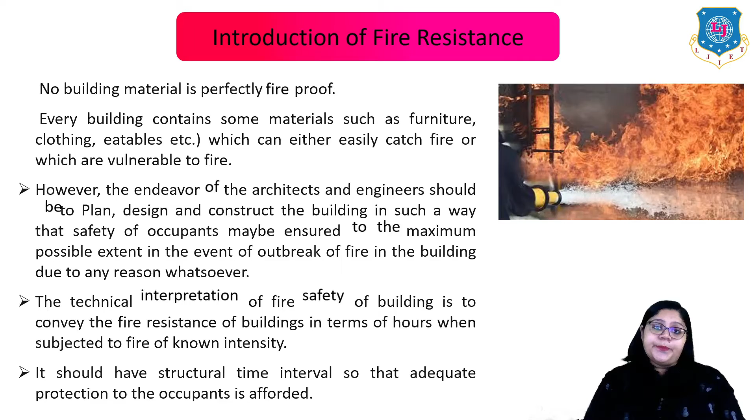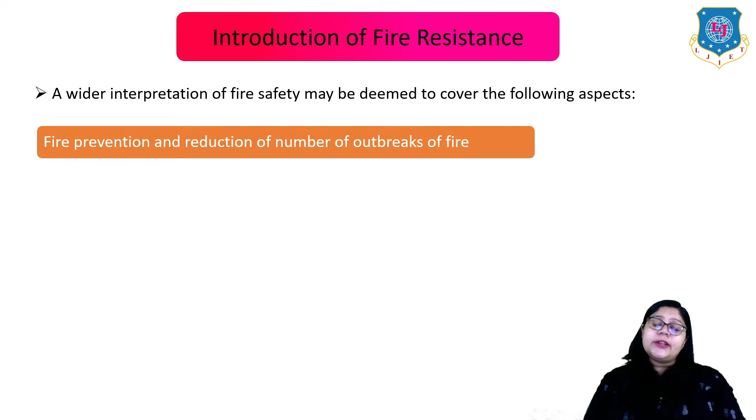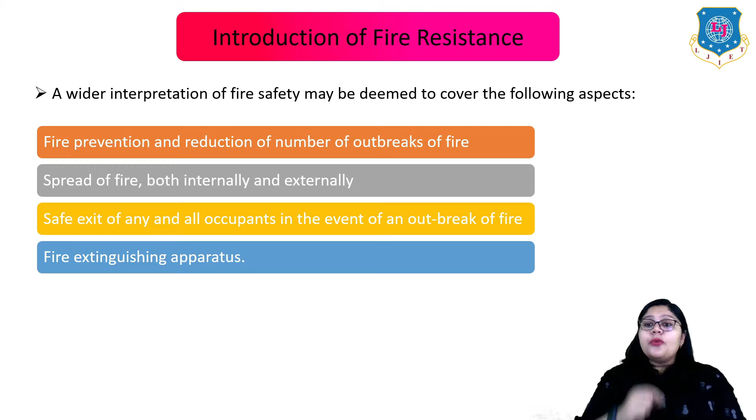A wider interpretation of fire safety may be deemed to cover the following aspects: fire prevention and reduction of number of outbreaks of fire, spread of fire both internally and externally, safe exit of all occupants in the event of an outbreak of fire, and fire extinguishing apparatus. Let me show you some causes of fire.

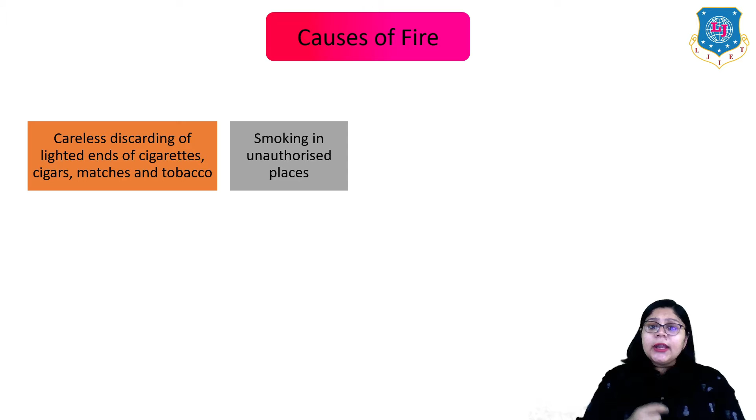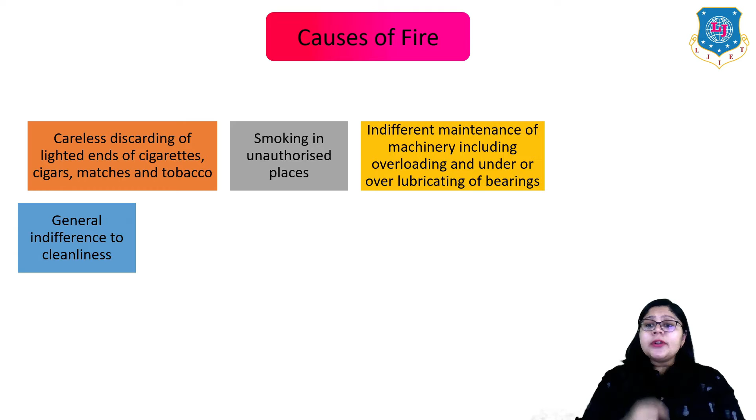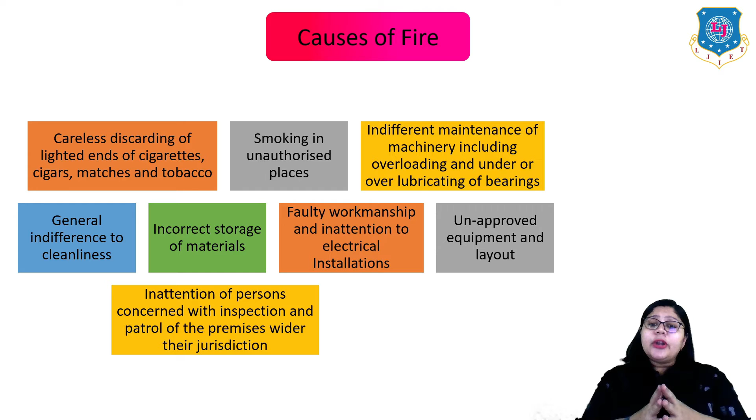The first cause is the careless discarding of the lighted ends of cigarettes, cigars, matches and tobacco, or smoking in unauthorized places. Other causes include indifferent maintenance of machinery including overloading and under or over lubricating of the bearings, general indifference to cleanliness, incorrect storage of materials, faulty workmanship and inattention to electrical installations, unapproved equipment and layouts, inattention of persons concerned with inspection and patrol of premises under their jurisdiction, and even unattention of fire safety regulations. So these are the different causes of fire.

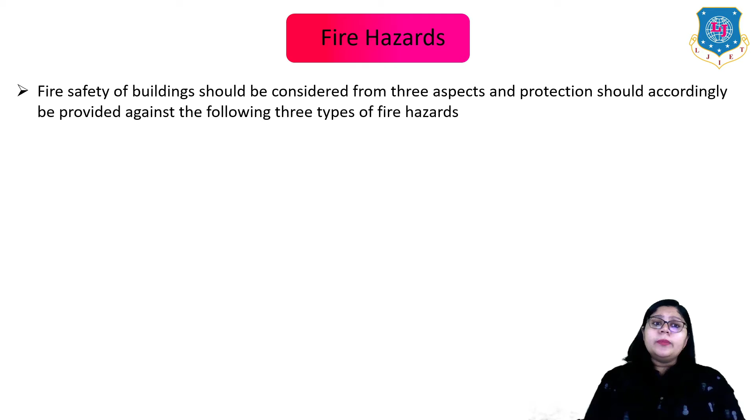Now let us see some fire hazards. Fire safety of building should be considered from three aspects and protection should accordingly be provided against these three aspects of fire hazard.

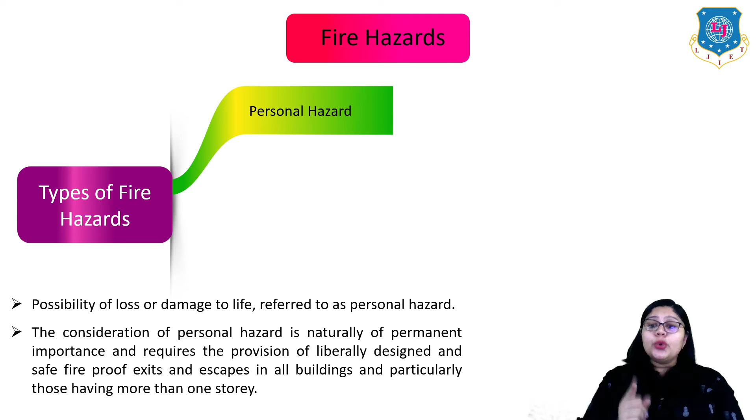The first type of fire hazard is personal hazard - the possibility of loss or damage of life. The consideration of personal hazard is naturally of permanent importance and requires the provision of liberally designed and safe fireproof exits and escapes in all buildings, particularly those having more than one story.

Second is the internal hazard - the possibility of fire occurring and spreading inside the building itself. Internal hazard concerns damage or destruction of the building and directly influences personal hazard. The internal hazard is directly related to the fire load, which in turn enables the building to be graded when considered along with the duration of fire.

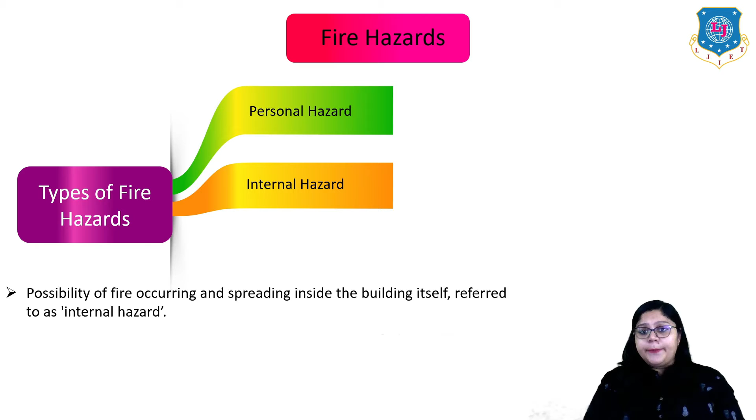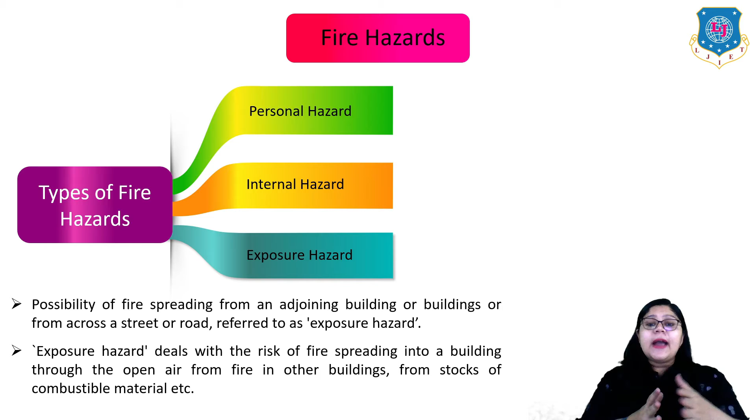The last one is exposure hazard - the possibility of fire spreading from an adjoining building or buildings, or from across a street or road. Exposure hazard deals with the risk of fire spreading into a building through the open air from fire in other buildings or from stocks of combustible material. So these are the three different types of fire hazards.

Now let us understand the most important term, which is fire load. Fire load is the amount of heat in kilocalories which is liberated per square meter of floor area of any compartment by the combustion of the contents of the building and any combustible part of the building itself. This amount of heat is used as the basis of grading of occupancies. The fire load is determined by multiplying the weight of all combustible material by their calorific value and dividing by the floor area under consideration.

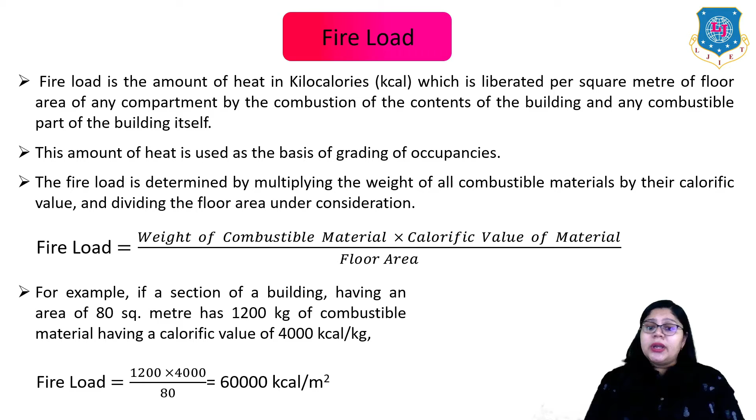So fire load is equal to the weight of combustible material multiplied by the calorific value of material, divided by the floor area. For example, if a section of a building having an area of 80 square meters has 1200 kg of combustible material having a calorific value of 4000 kilocalorie per kg, what will be the fire load? Simply put all the values in the equation and you will get the fire load. So that is how we can calculate fire load.

Different materials having the same weight and the same calorific value may present different hazards on account of other properties, such as rate of ignition, speed of burning, and liberation of dangerous fumes. So materials are classified for the purpose of assessing fire grading under the heading non-hazardous, hazardous, or extra hazardous based on the following characteristics.

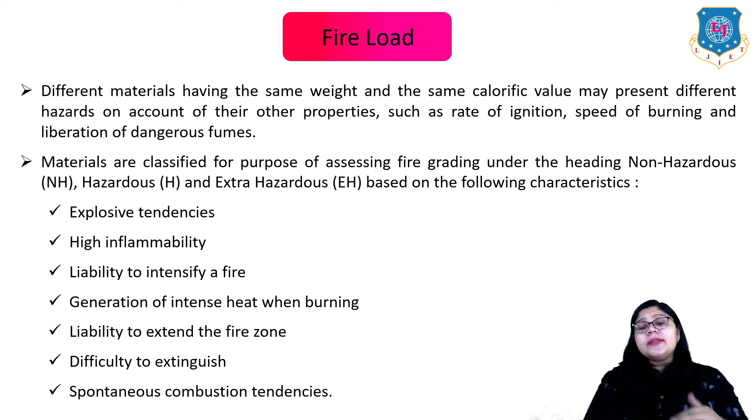The first characteristic is explosive tendencies, then high inflammability, then liability to intensify a fire, then generation of intense heat when burning, then liability to extend the fire zone, difficulty to extinguish, and some spontaneous combustion tendencies. These are all the different characteristics.

Now let me give you an idea about the grading of occupancies by the fire load. Based on Indian Standard IS 1641-1960, fire loads are graded into three categories: low fire load, moderate fire load, and high fire load, where the values have different ranges for different occupancies.

For the low fire load, the value is less than 2,75,000 kilocalorie per meter square, covering occupancies like domestic buildings, hotels, boarding houses, restaurants, schools, hospitals, temples, mosques, commercial offices, factories, and workshops of non-hazardous nature.

For the moderate fire load, the range is about 2,75,000 to 5,50,000 kilocalorie per meter square, where the occupancies are like retail shops, emporiums, bazaars, factories, and workshops.

The last one is the high fire load, where the range is between 5,50,000 kilocalorie per meter square to 11 lakh kilocalorie per meter square, with occupancies like godowns and similar buildings used for bulk storage of non-hazardous materials and goods. So these are the gradings.

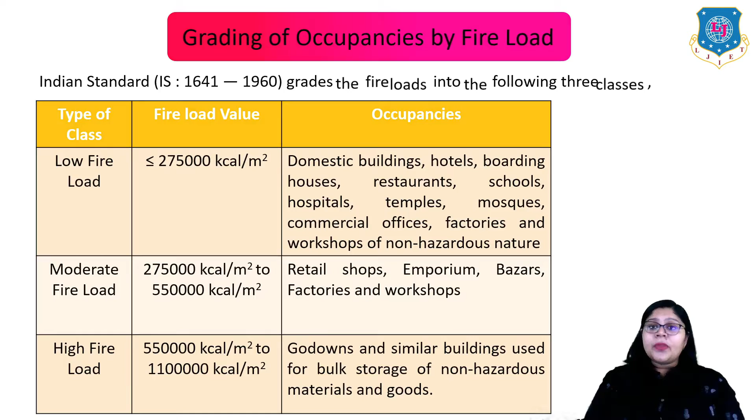Now let me give you an idea about the grading of structural elements by the fire load. The structural elements of a building are graded for fire resistance by the time for which they resist a standard fire of given time temperature grading, which is based on observations in actual fires.

The relationship between the actual fire, expressed as fire load, and the standard fire is established by burning down weighed combustible material corresponding to the different classes of fire loads, so as to match the time temperature grading of the standard fire.

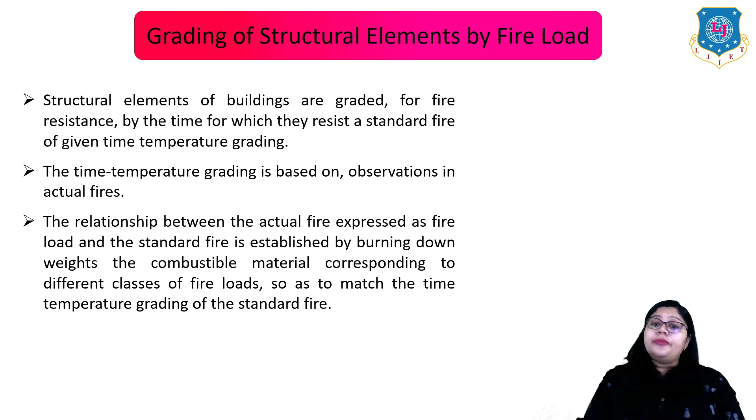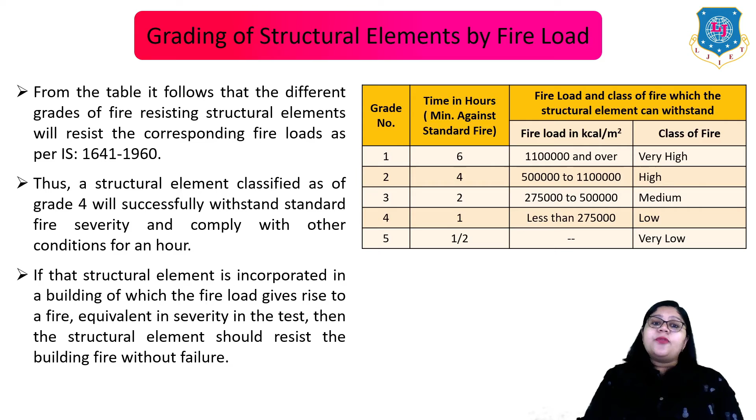Now let us see some of the grading of buildings according to fire resistance. In grading buildings according to the fire resistance and structural precautions provided, it has been assumed that no assistance will be forthcoming from the municipal fire brigade and that no firefighting apparatus has been provided or attached to that particular building. The National Building Code of India divides buildings into four types according to the fire load and the building is designed to resist.

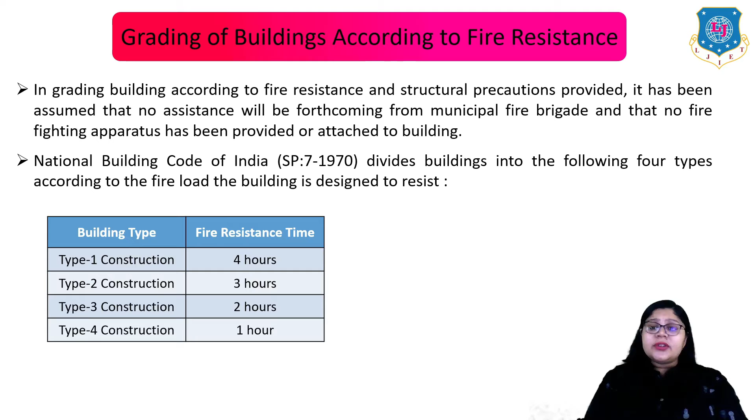Here you can see a table where the building type is mentioned according to type: type 1 construction having a fire resistant time of 4 hours, type 2 construction having a fire resistant time of 3 hours, type 3 construction having a time of 2 hours, and lastly type 4 having a time of 1 hour.

Experience shows that with firefighting equipment installed in the premises, the duration of fire in a building having a fire load between 5 lakh to 11 lakh kilocalorie per meter square is usually less than 3 hours. Hence, type 1 construction prescribed for this class of building generally ensures sufficient protection.

However, in buildings covered under type 1, proper ventilation and provision for escape of hot gases should be made. Also, when firefighting equipment or the services of the fire brigade are available in the premises, the design should provide for immediate access from several positions.

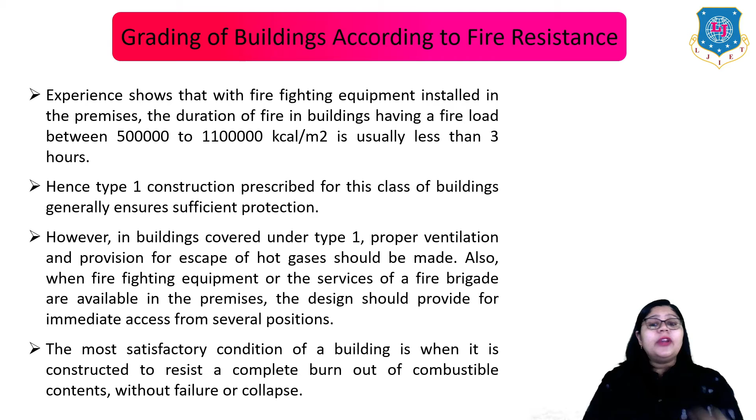The most satisfactory condition of a building is when it is constructed to resist a complete burnout of combustible contents without failure or collapse. Now let me give you the idea about some of the characteristics of fire resisting materials.

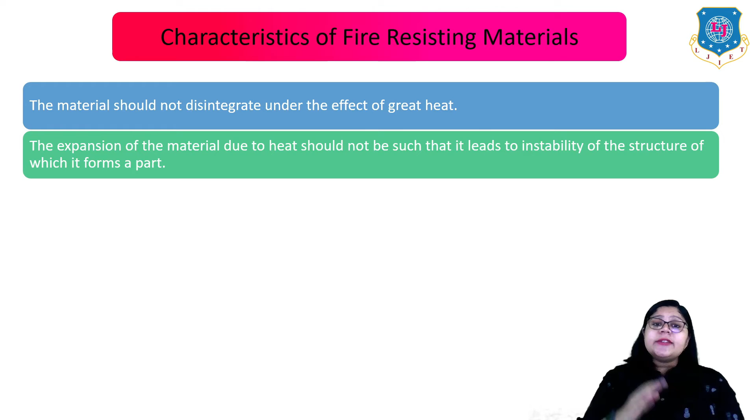The material should not disintegrate under the effect of great heat. The expansion of the material due to heat should not be such that it leads to instability of the structure of which it forms a part.

The contraction of the material due to sudden cooling with water after it has been heated to a high temperature should not be rapid.

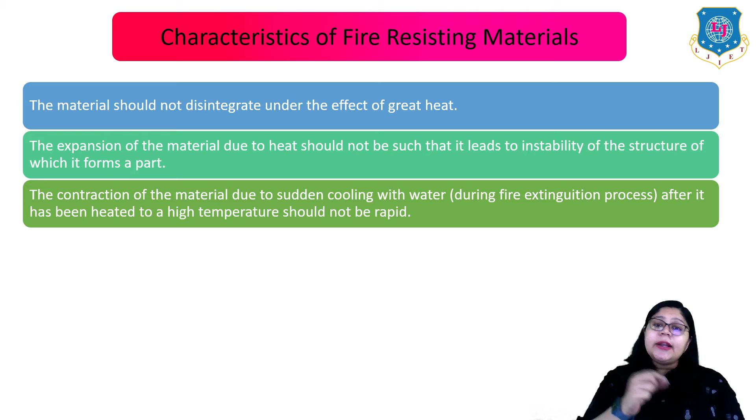Now let me give you an idea about some of the general fire safety requirements for buildings, so that the fire hazard, which can be of personal, internal and exposure type, is minimized. Our IS code recommends that the building shall conform to the following general requirements.

The first one says all buildings, particularly buildings having more than one story, shall be provided with liberally designed and safe fireproof exits or escapes. The second says the exits shall be so placed that they are always immediately accessible and each is capable of taking all the persons on that floor, as alternative escape routes may be rendered unusable due to the fire.

Third, the escape routes shall be well ventilated, as persons using the escapes are likely to be overcome by smoke or some fumes which may enter from the fire.

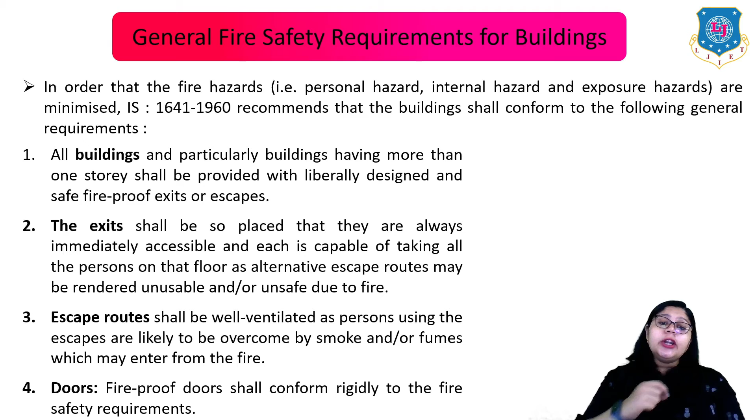Fourth is about doors: fireproof doors shall conform rigidly to the fire safety requirements. Fifth, where fire resisting doors are employed as cutoffs or fire breaks, they shall be maintained in good working order so that they may be readily opened to allow quick escape of persons trapped in that section of the building, and also when necessary, prompt rescue work can be expeditiously carried out.

Sixth is electrical or mechanical lifts. While reliable under normal conditions, they may not always be relied on for escape purposes in the event of a fire, as the electrical supply to the building itself may be cut off or otherwise interrupted, or those relying on mechanical drive may not have the driving power available.

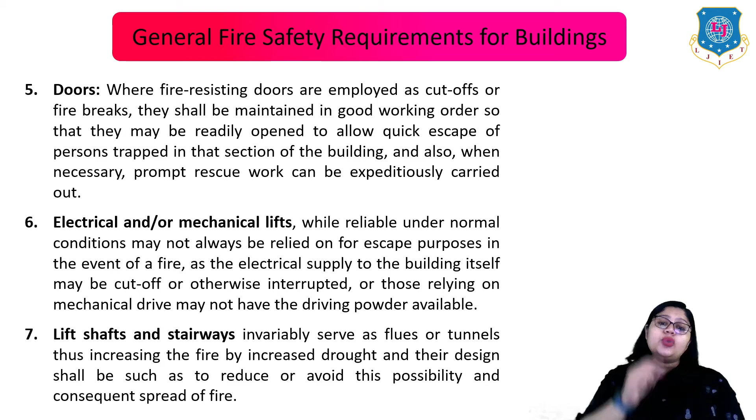Seventh, lift shafts and stairways, which invariably serve as flues or tunnels, thus increasing the fire by increased draught, in their design shall be such as to reduce or avoid this possibility and consequent spread of fire.

Next is the false ceiling. It shall be constructed so as to prevent either total or early collapse in the event of fire, so that persons underneath are not fatally trapped before they have time to reach the exits.

To a lesser extent, the provisions of clause 8 above shall apply to single story buildings. Whatever be the class or purpose of the building, the design and construction shall embody the fire retardant features for ceilings and roofs.

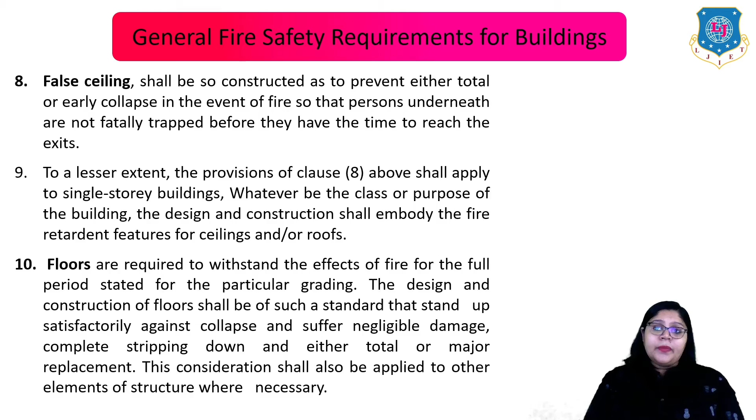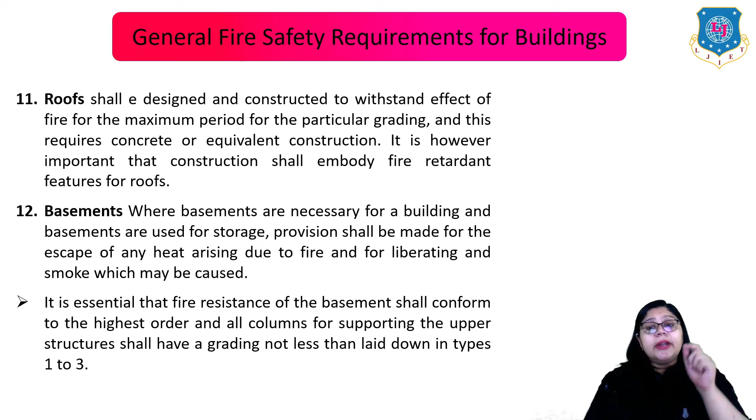The 12th one is the basement. Where basements are necessary for buildings and are used for storage, provision shall be made for the escape of any heat arising due to fire and for liberating any smoke which may be caused. It is essential that the fire resistance of the basement shall conform to the highest order, and all columns supporting the upper structure shall have a grading not less than laid down in type 1 to 3.

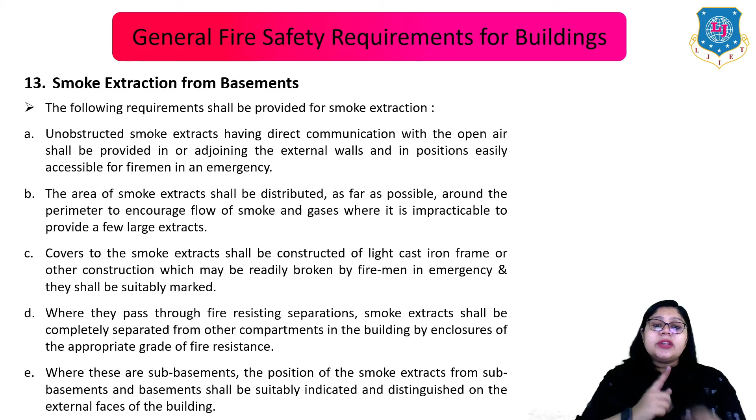Next, where they pass through fire resisting separations, smoke extracts shall be completely separated from other compartments in the building by enclosures of the appropriate grade of fire resistance. Where there are sub-basements, the position of the smoke extracts from the sub-basement and basement shall be suitably indicated and distinguished on the external faces of the building.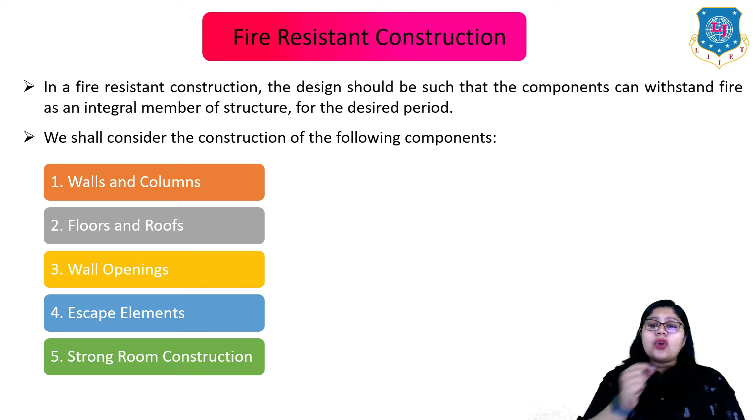Now let me give you an idea about some fire resistant construction. In a fire resistant construction, the design should be such that the components can withstand fire as an integral member of the structure for the desired period. We shall consider the construction of the following components: walls and columns, floors and roof, wall openings, escape elements, and strong room construction. Let us understand these one by one.

Let me talk about the first one, walls and columns. The following points should be observed for making walls and columns fire resistant: masonry walls and columns should be made of thicker sections so that they can resist fire for a longer time and can also act as a barrier against spread of fire to adjoining areas.

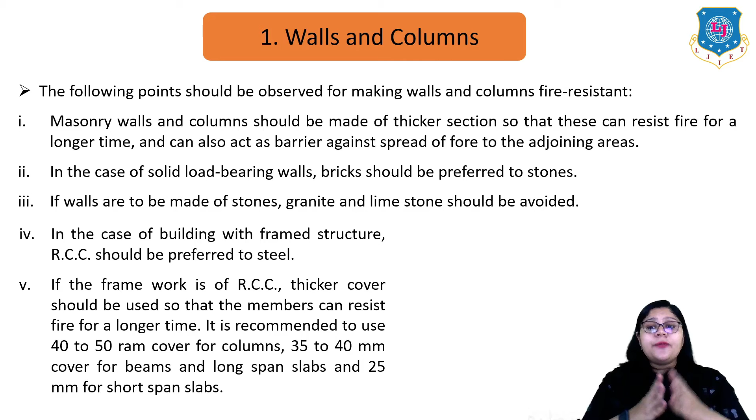In the case of solid load bearing walls, bricks should be preferred to stones. If walls are to be made of stones, granite and limestone should be avoided. In buildings with frame structure, RCC should be preferred to steel. If the framework is of RCC, thicker cover should be used so that the members can resist fire for a longer time. It is recommended to use 40 to 50 mm cover for columns, 35 to 40 mm cover for beams and long span slabs, and 25 mm for short span slabs.

Adding to this, if steel is used for the frame structure, the steel structural components should be properly enclosed or embedded in concrete, terracotta, brick, gypsum, plasterboard, or any suitable material, as illustrated in the figure.

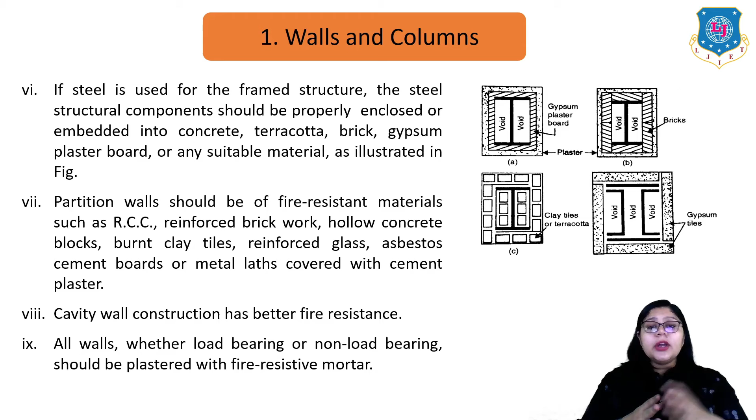Next, partition walls should be of fire resistant material such as RCC, reinforced brickwork, hollow concrete block, burnt clay tiles, reinforced glass, asbestos cement board, or metal lath covered with cement plaster. Cavity wall construction has better fire resistance. All walls, whether load bearing or non-load bearing, should be plastered with fire resistive mortar.

Now let me give you an idea about the second type, which is the floors and roofs. We have to follow some points which are noteworthy for this kind of floors and roof.

For better fire resistance, a slab roof is preferred to a sloping or pitched roof. If it is essential to provide a sloping roof, trusses should either be of RCC or of protected rigid steel with fireproof covering. For better fire resistance, the floor should either be of RCC, or hollow tile ribbed floor, or concrete jack arch floor with steel joists embedded in the concrete.

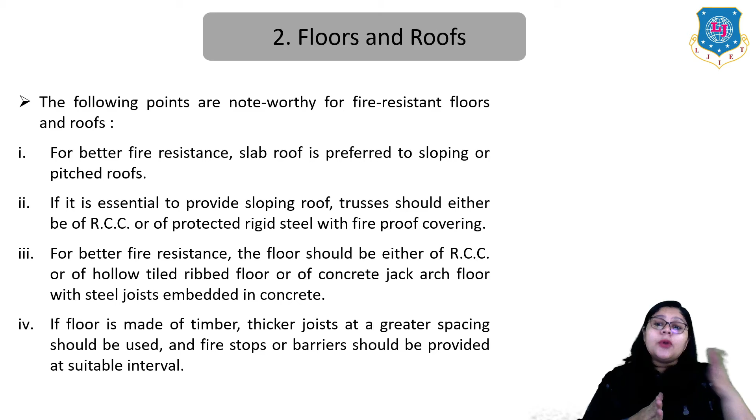If the floor is made of timber, thicker joists at greater spacing should be used, and fire stops or barriers should be provided at suitable intervals. Flooring materials like concrete tiles, ceramic tiles, brick, etc. are more suitable for fire resistance.

If cast iron, wrought iron, cork carpet, rubber tiles, etc. are to be used, these should be protected by a covering of insulating material like ceramic tiles, plaster, terracotta, or bricks. Ceilings directly suspended from floor joists should be of fire resistant material like asbestos cement board, fiber boards, or metal lath with plaster.

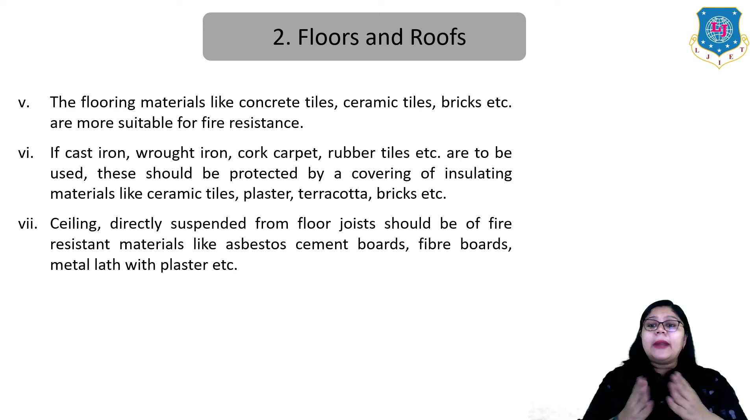Now let me give you an idea about wall openings. From the point of view of fire spread, openings in the wall should be kept to a bare minimum. Openings serve as means of escape, so they should be properly protected by suitable arrangements in case of fire.

Doors and windows should be made of steel, and fire resistant doors can be obtained by fixing steel plates to both sides of the door. Wire glass panels are preferred for windows. Rolling shutter doors should be used for garages, godowns, shops, etc. In case of timber doors, minimum thickness of the door leaf should be 4 cm, and that of the door frame should be 8 to 10 cm.

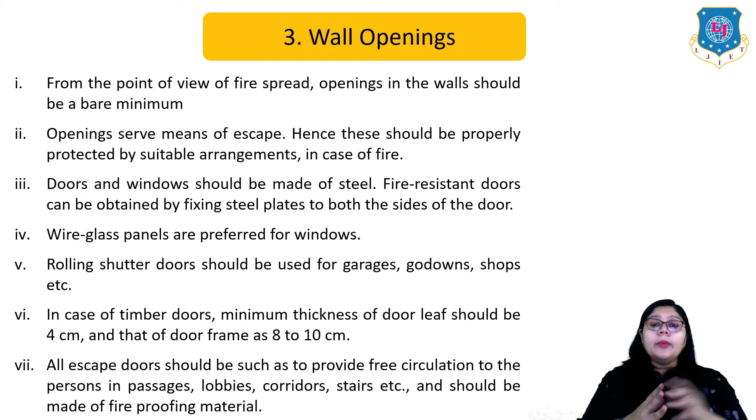All escape doors should be such as to provide free circulation to persons in passages, lobbies, corridors, or stairs, and should be made of fireproofing material.

Now let me give you the idea about the fourth element, which is the escape element. All escape elements such as the staircase, corridors, lobbies, entrance, etc. should be constructed of fire-resistant materials. These escape elements should be well separated from the rest of the building.

Doors to this escape should be fireproof and the staircases should be located next to the outer wall and should be accessible on any floor in the direction of flow towards the exit from the building. Fireproof doors to the emergency staircases should be fixed in such a way as to make them close from inside.

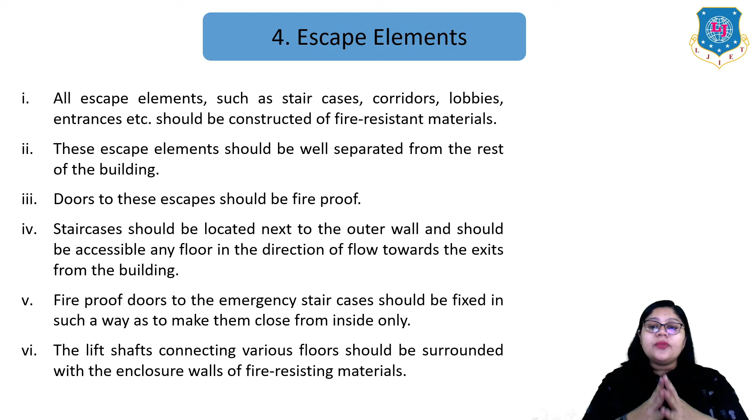The lift shaft connecting various floors should be surrounded with the enclosure walls of fire-resisting materials. Lift shaft should be vented from top to permit escape of smoke and hot gases. An emergency ladder should be provided in the fire-resisting building and this ladder should be at least 90 cm wide, constructed of fire-resistant material, so that all the escape routes over roof should be protected with railings, balustrades or parapets not less than 1 meter in height.

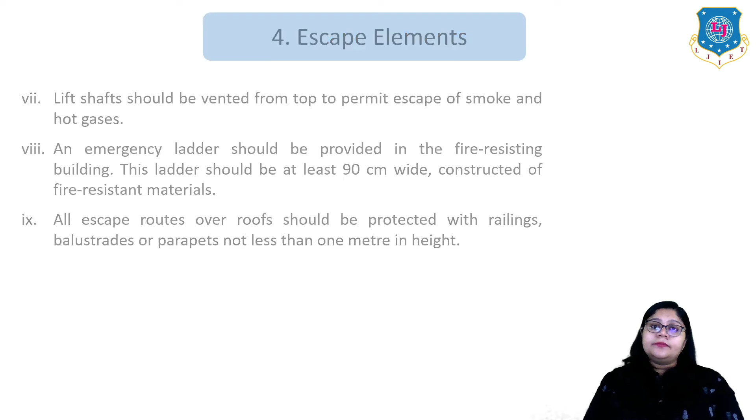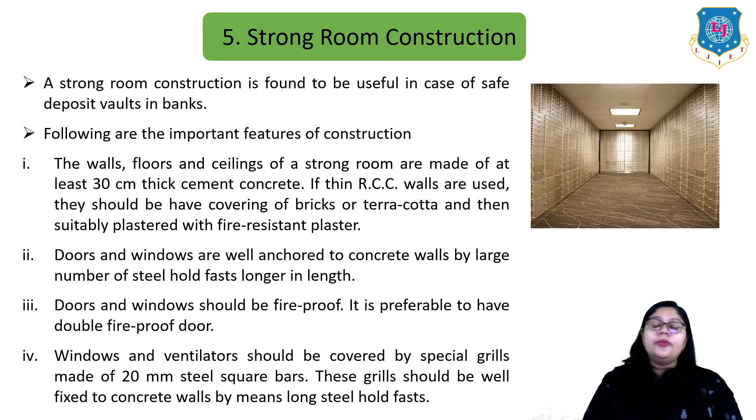Windows and ventilators should be covered by special grills made of 20 mm steel square bars. These grills should be well fixed to concrete walls by means of long steel hold fasts. Here you can see an example of strong room construction.

Now let me give you an idea about some of the fire extinguishing equipments. The first one is the manual fire extinguishing equipment, then the fire hydrants, then the wet riser system, and the automatic sprinkler system. Let us understand the first one, manual fire extinguishing equipment.

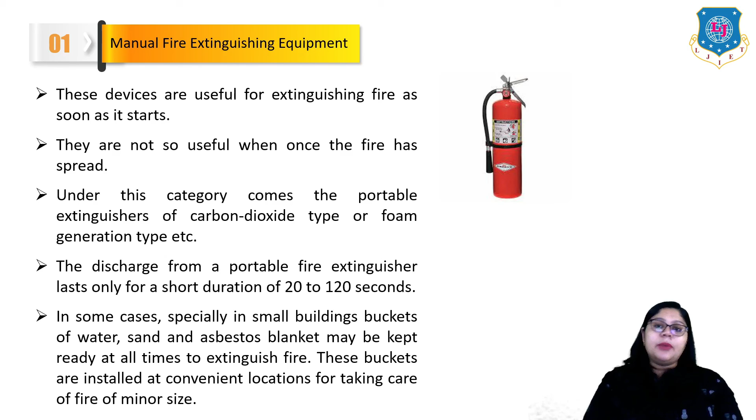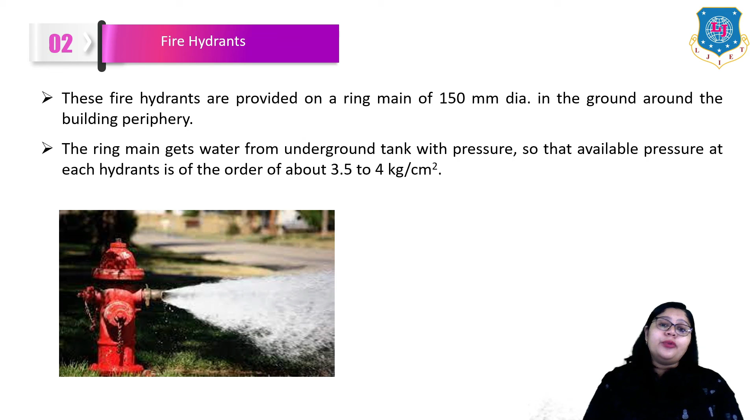Now let me talk about the second one, which is fire hydrants. These fire hydrants are provided on a ring main of 150 mm diameter in the ground around the building periphery. The ring main gets water from an underground tank with pressure so that the available pressure at each hydrant is of the order of about 3.5 to 4 kilogram per centimeter square, as shown in this figure.

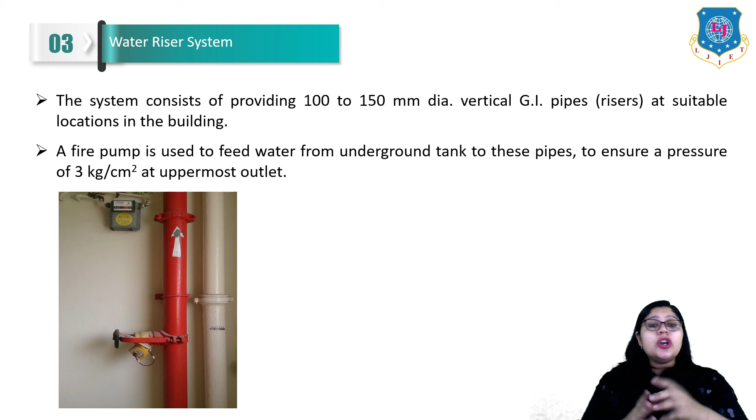Now let us talk about the third one, which is all about the wet riser system. Here the system consists of providing 100 to 150 mm diameter vertical GI pipes at suitable locations in the building. A fire pump is used to feed water from the underground tank to these pipes to ensure a pressure of 3 kg per centimeter square at the uppermost outlet, as shown in this figure.

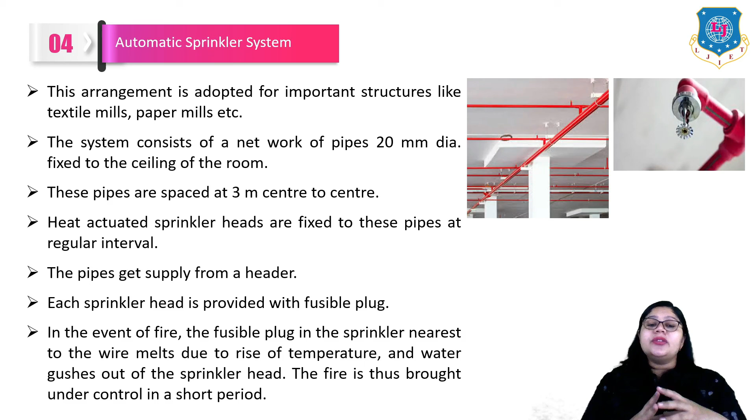So these are all the four equipments which we use for fire extinguishing work. With these, we have covered all the topics regarding fire resistance. I hope you understand all the topics in detail. Thank you for watching. See you soon in the next lecture.